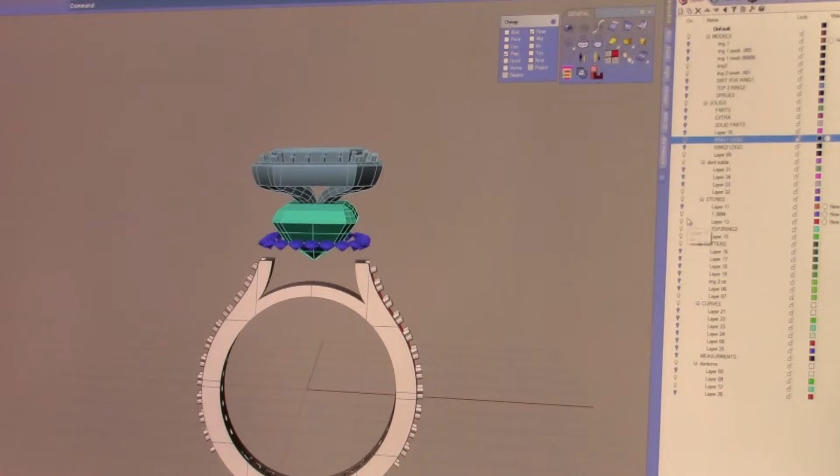I've got a good one, Tom. How do you keep from getting breakdown in your casting, especially at the thin spots? That is a problem that everyone has to address if they want a good part.

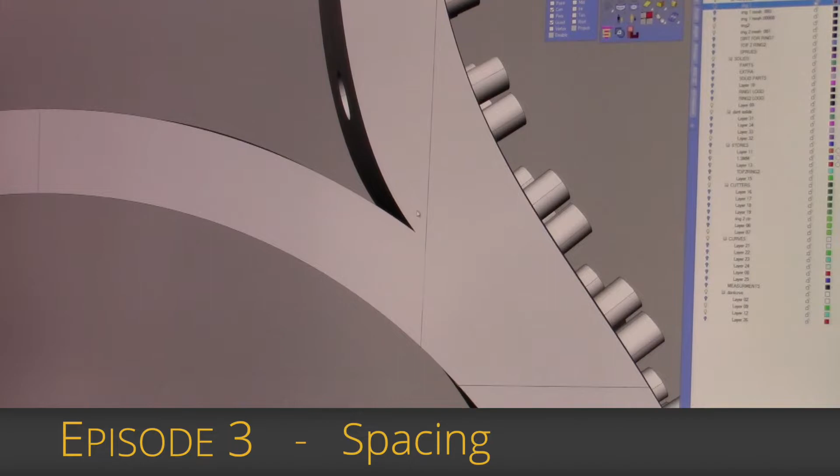Well, we built 3D parts to cast them in order to be exact, to get the left and the right side perfect. Unlike doing things by hand, where left and right might vary a little bit. You know, my hand shakes, so the right side's not going to look like the left side. So we have the advantage of the CAD programming in order to help us with that.

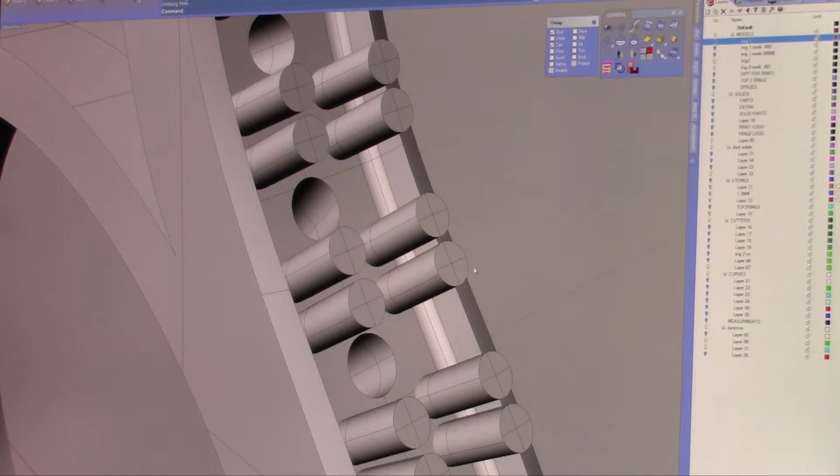However, I must show you that the tolerances needed to build a part, the tolerances needed to cast a part, have to be in your mind when you're creating a CAD ring or a CAD part, whatever it is. If we take these two prongs here and we measure the distance between them, the distance is not even 1/10 of a millimeter. That's too small. That is not even the thickness of a piece of copy paper.

However, when you go to cast it, the investment will go in there between, and then when we put gold or silver or whatever precious metal you're going to cast it in, it will break away, float around, and cause porosity, and then the casting's lost. So all that work up to that point will be gone. It has to be done again. So you lose 2 days, sometimes 3 days.

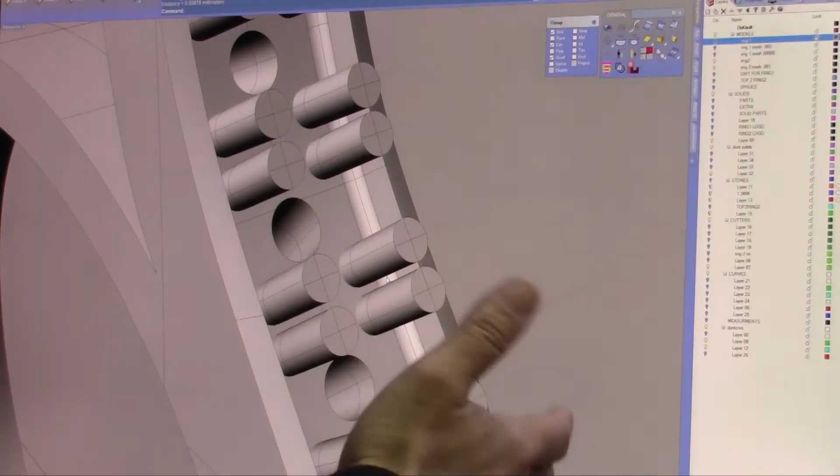If this was done correctly, if your tolerance between the prongs was, let's say, 1/2 millimeter, or if it was 0.1 on the bottom as it tapered up, if you make that tapered prong and give it the drafting that is needed, then as it comes up, it becomes heavier. Now it's going to hold, because that's an opposing pyramid that's going to hold that and not let it flake off. That's one thing that you can do to help your project get along faster.

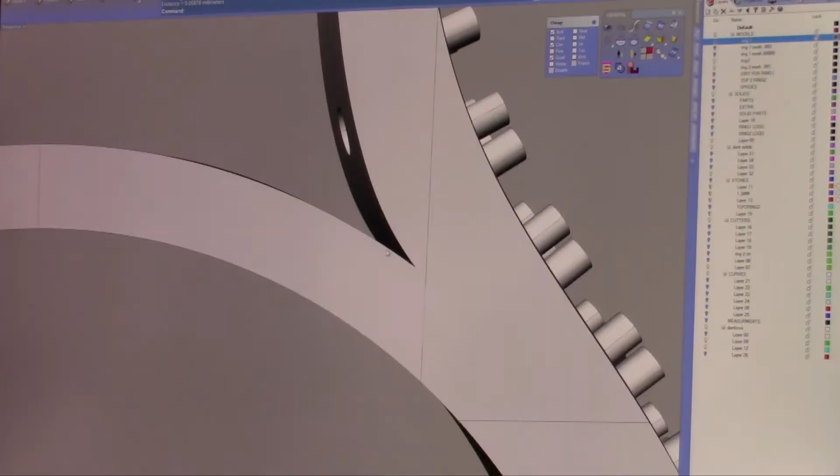Well, that's great. But what about issues in other areas, like galleries? You're talking about knife edges and not being filleted. The other thing you have to consider is in CAD, you could do things extremely sharp, where in the real world, it doesn't work. For instance, we have this gallery here. If we go to our front viewport, it comes down to a knife edge.

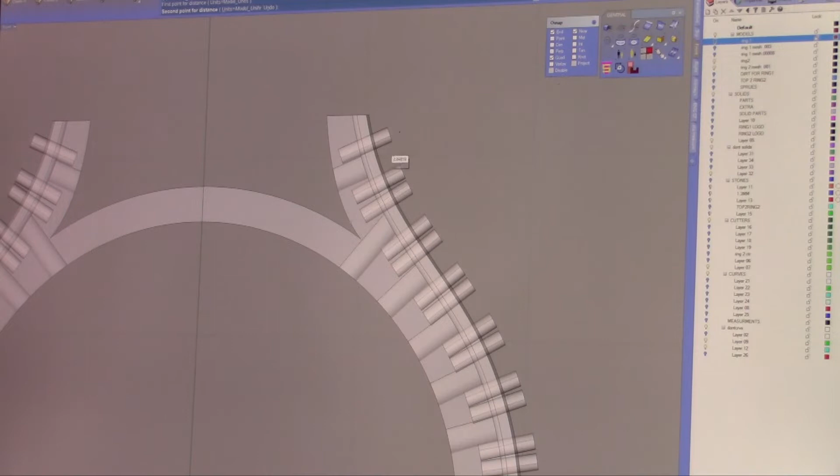Well, the knife edge looks good, but it's not practical, because even if you move up about 1 millimeter from there and take a measurement on this. Alrighty, let's go here. That's 2/10 of a millimeter, and I'm about 1 millimeter up. Let's see if I can get a line dimension. No, it won't. Let me see if it'll show it. There we go. So you see, it's 0.25 right at this area, and we're more than 1 millimeter up.

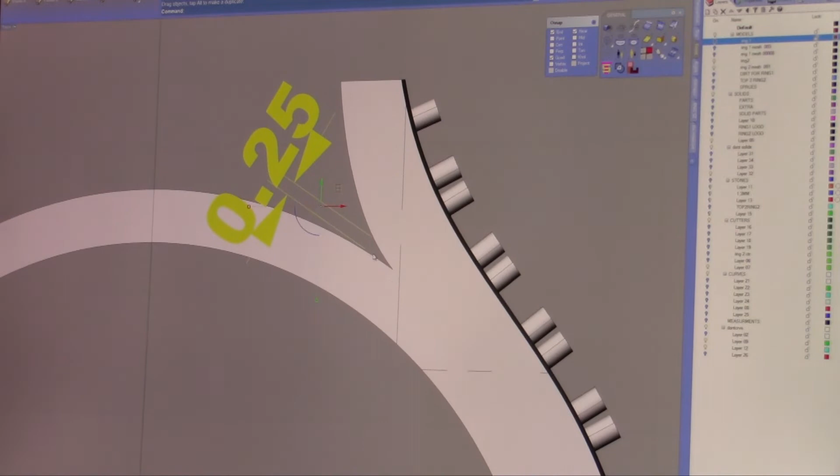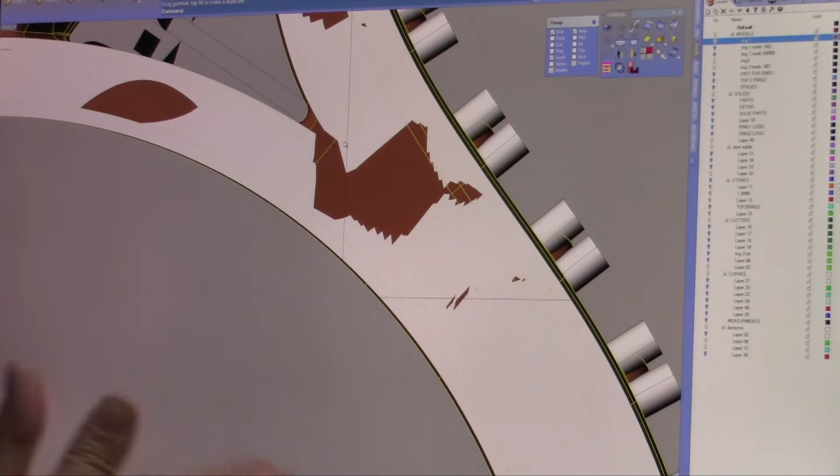The way to solve this problem quickly is to radius the inside, like we have here. You'll notice the difference as we bring it up here, and these are the same ring, the same shank. However, at this point, I've radiused it, so it won't fill in with that very, very thin piece of investment, besides the fact you won't be able to clean it, and you won't even be able to get a saw blade through there. It's better if you have some kind of radius to help the build and to help the casting.

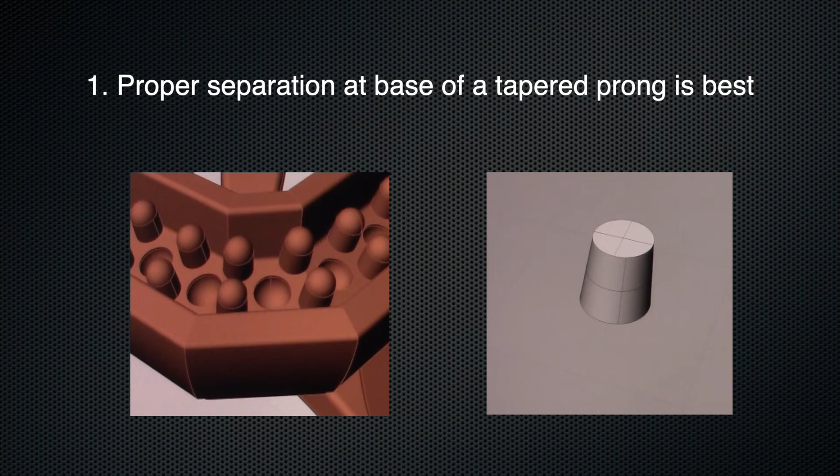So in summary, we covered casting tolerances between prongs and sharp interior angles that finish in a knife edge.